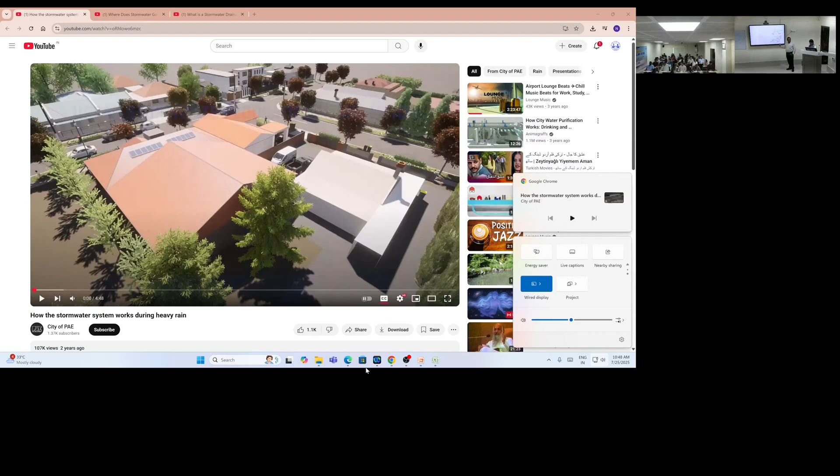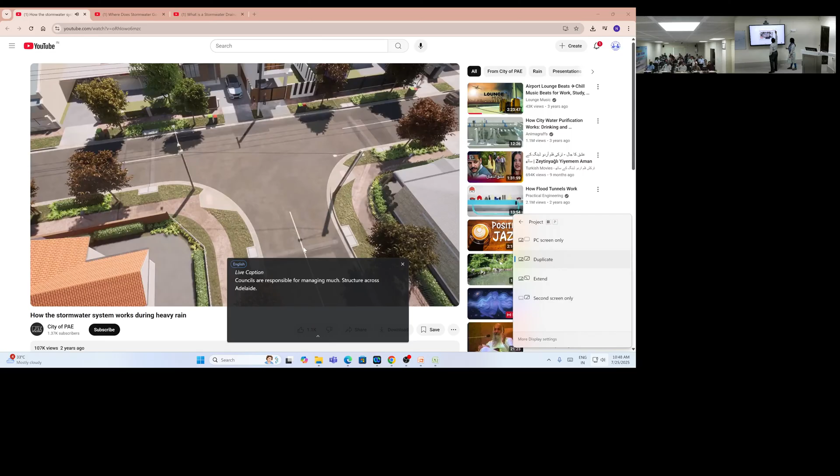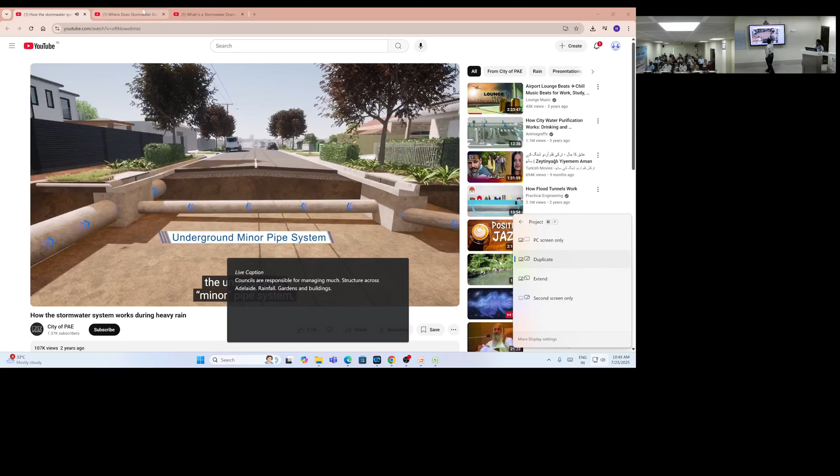Councils are responsible for managing much of the stormwater infrastructure across Adelaide. This video explains how urban stormwater systems work and what happens when we have rainfall. Rainwater falls on surfaces such as parks, roads, gardens and buildings. Rain runs off roofs, through downpipes and out to the street. A typical stormwater system has two parts that work in tandem: the underground minor pipe system and the overland major road system. Here is a cross-section of the underground minor stormwater system. This system transports stormwater during smaller storm events that typically occur once every 2 to 5 years.

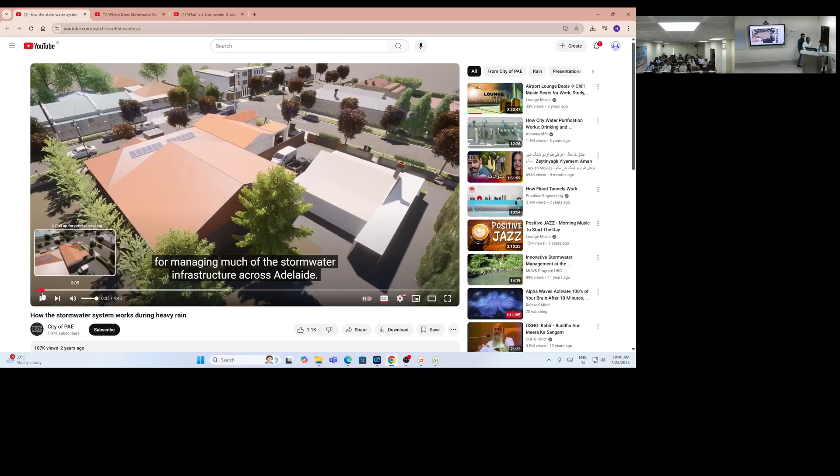Across Adelaide, this video explains how urban stormwater systems work and what happens when we have rainfall. Rainwater falls on surfaces such as parks. Councils are responsible for managing much of the stormwater infrastructure across Adelaide.

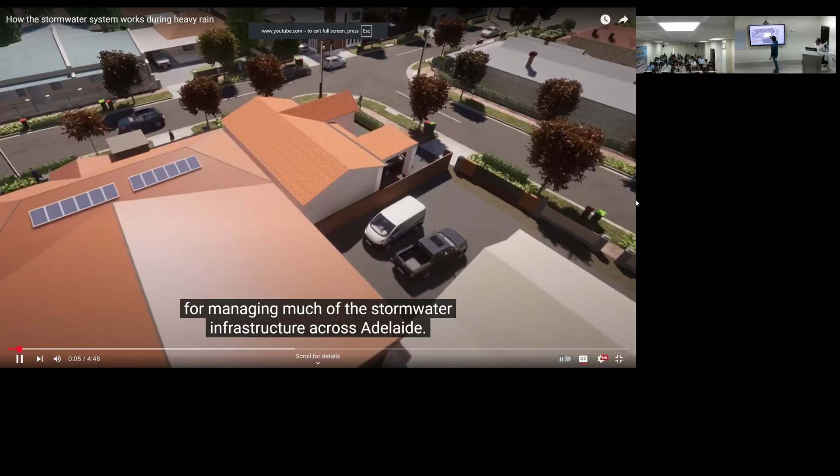This video explains how urban... why isn't the video playing there? Councils are responsible for managing much of the stormwater.

I stress you all to involve yourself always in such technological things. They are very easy to learn. You won't learn in one go, but you'll learn in 2 attempts. So this is one urban drainage, how storm water goes during the rainy season.

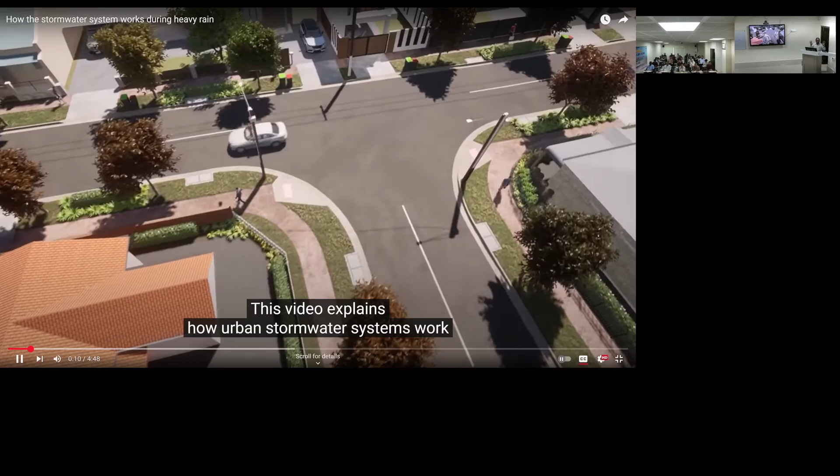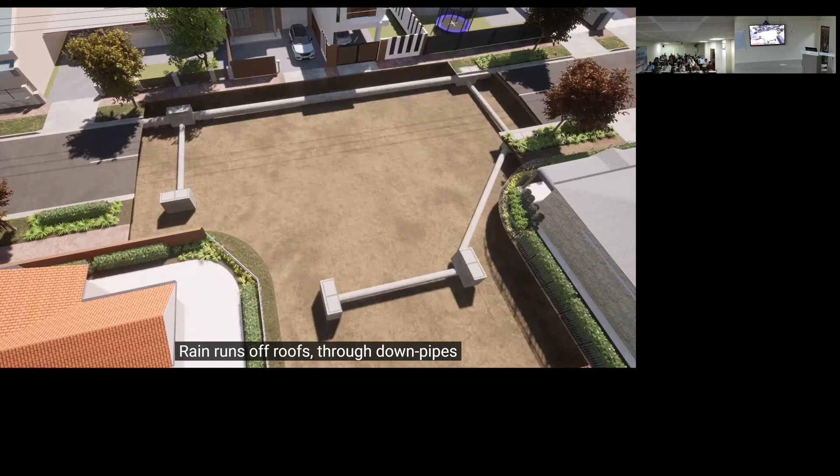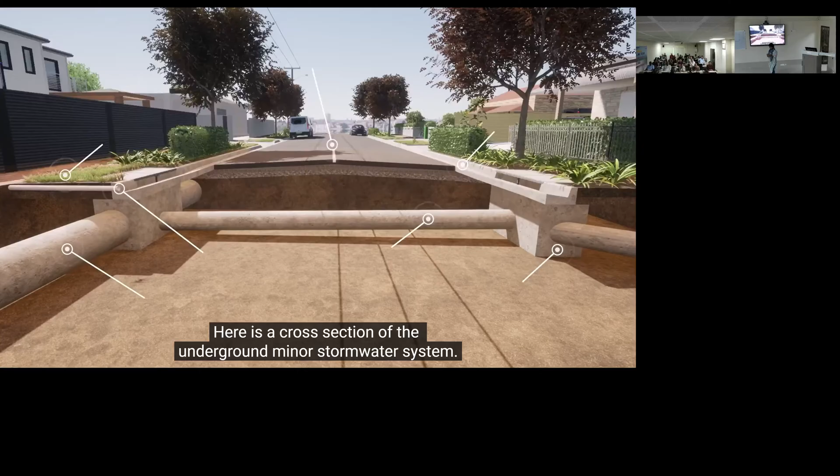Then flows into drains called side entry pits. The water then flows through a network of pipes where it is then discharged out to a creek, river, lake or ocean. When it rains...

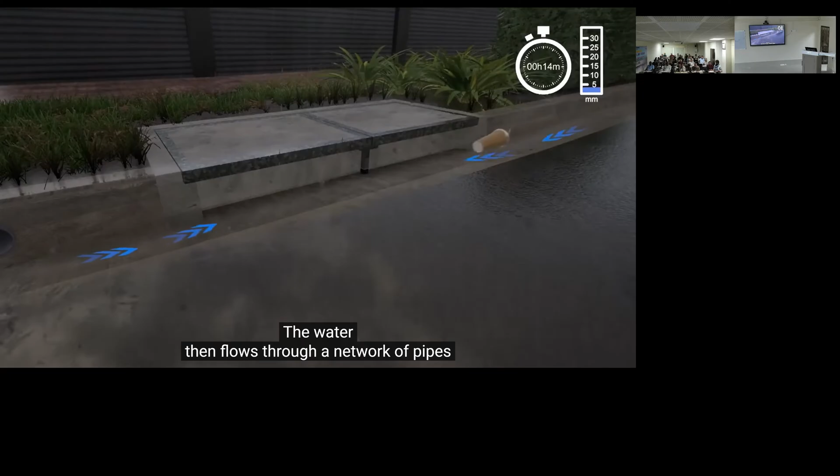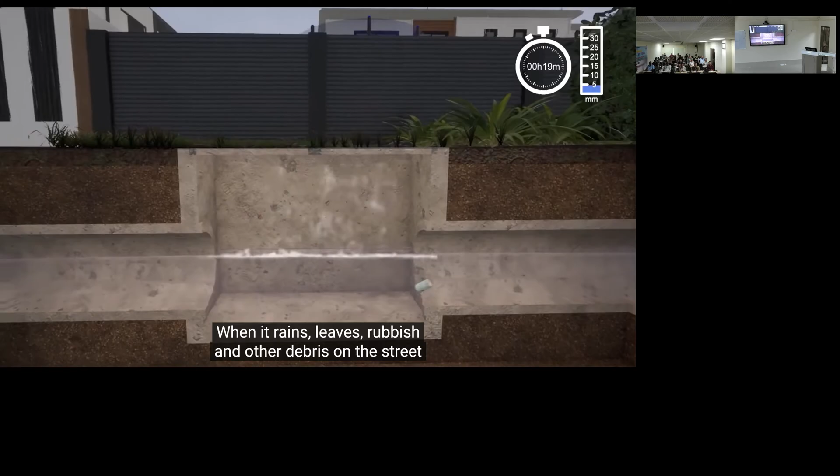Leaves, rubbish and other debris on the street can be washed into and may block stormwater drains. While street sweeping helps in picking up some rubbish, it cannot pick up everything, especially during autumn and winter where there is an increase in the amount of leaf matter on roads and footpaths.

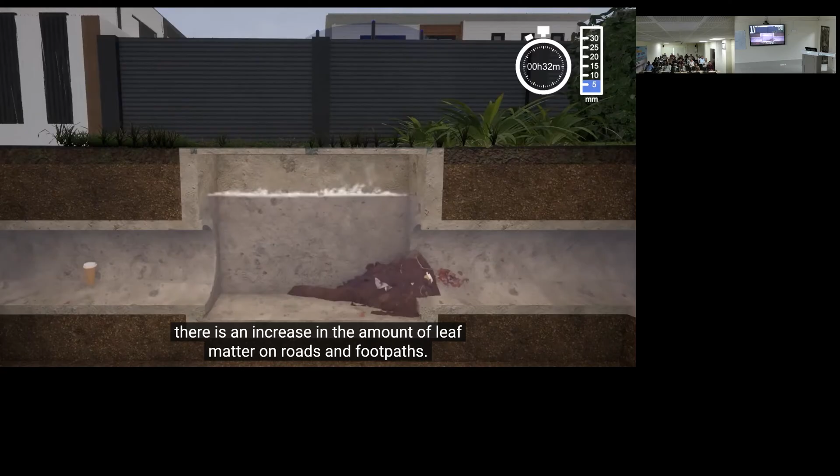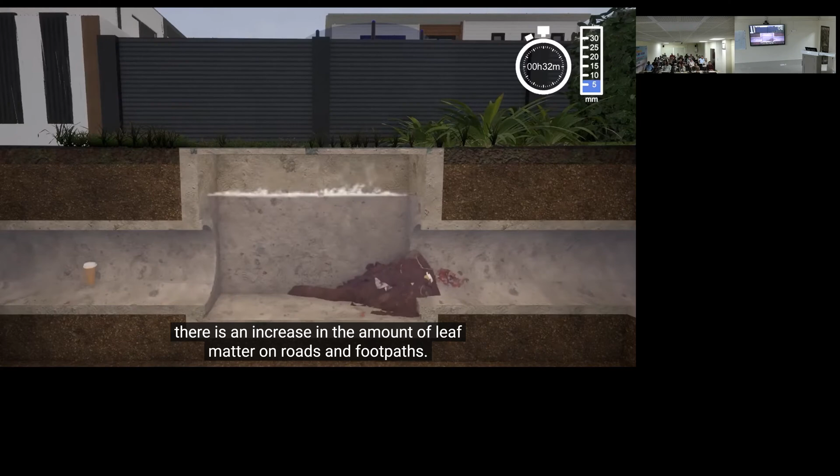Bigger storms with heavier rainfall occur less frequently. However, during these storms, the underground stormwater system fills and reaches its capacity. Stormwater in the gutters may subsequently start to rise and reach levels where the road becomes completely submerged, followed by the council verge. It is during these storms where we may experience temporary flooding of streets, as the street becomes the major overland stormwater system.

When this happens, it's important to not drive or walk on flooded roads, as you cannot see the condition of the road underneath or if there are any obstacles.

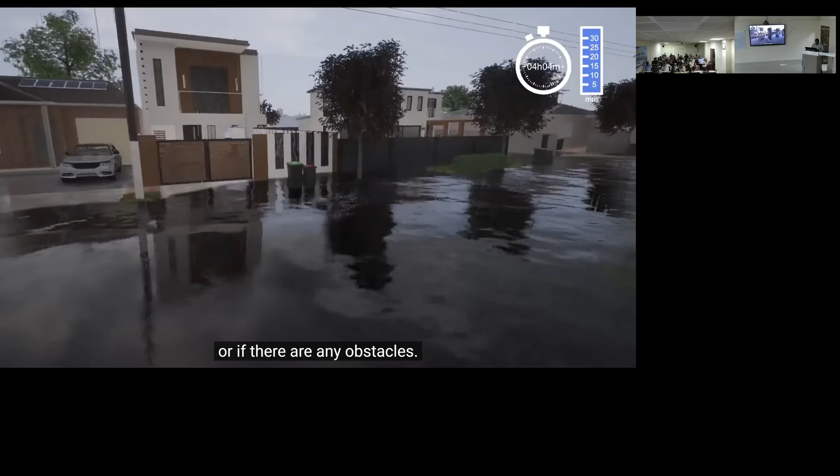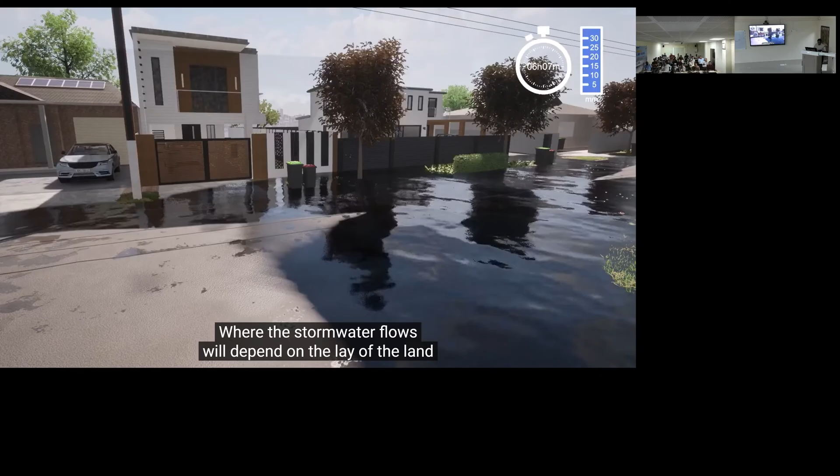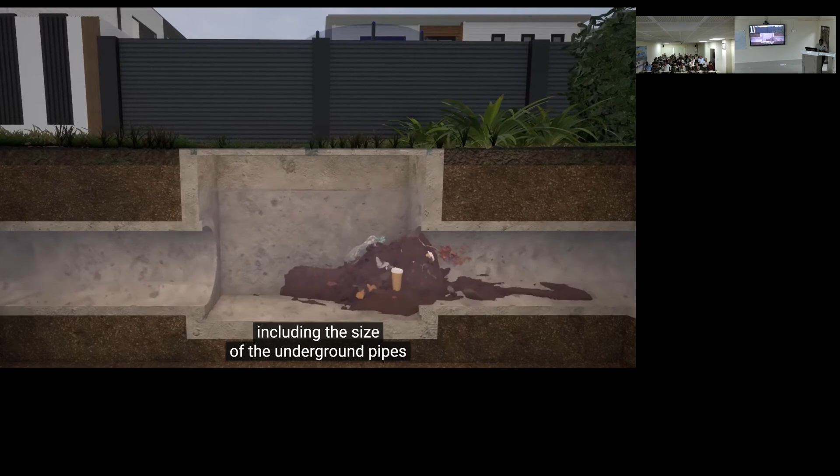Some urban stormwater systems along the coast are also influenced by tide levels. Major rain events that coincide with high tides or ocean storm surges impact the minor stormwater system's ability to drain out to sea. Even after the rain has stopped, there may be flooding until the tide level falls. During these times, stormwater may remain or pool in the streets for a longer duration. Likewise, during widespread heavy rains, creek and river levels rise and prevent the minor systems from freely draining, resulting in upstream flooding.

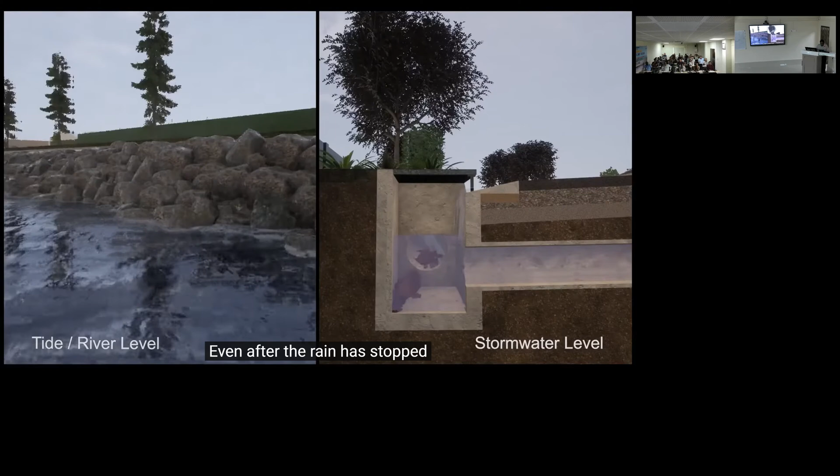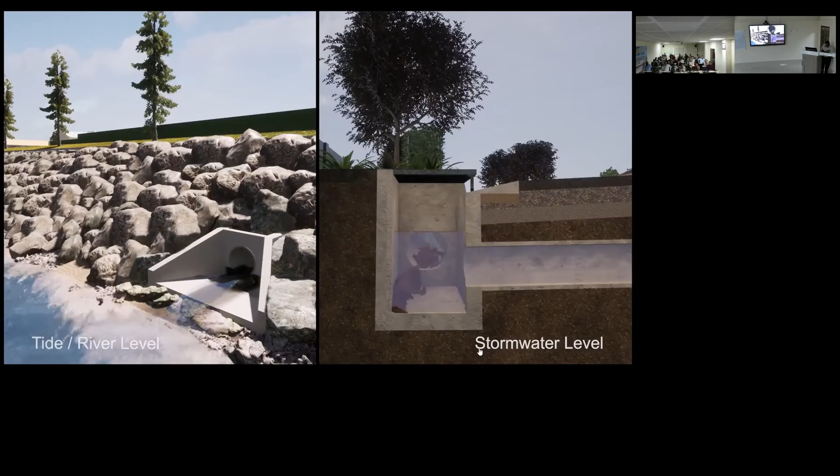This includes pairing stormwater management plans with other stormwater infrastructure. For information, the important thing here is...

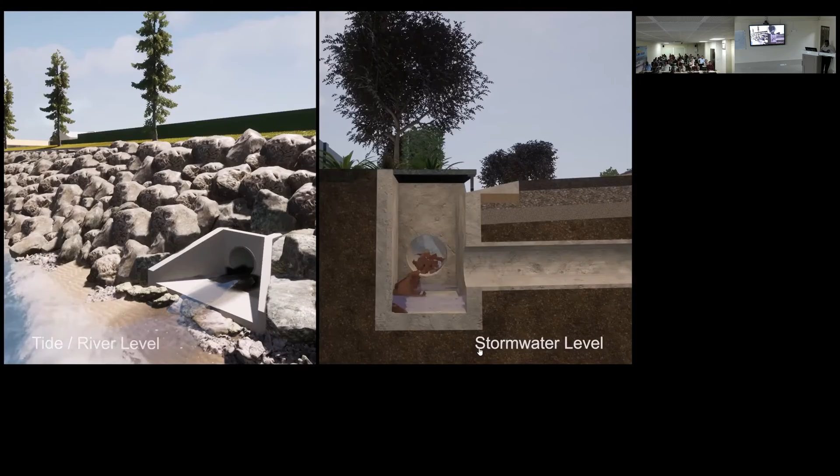How economically sound your city, municipal council, or urban local body is determines how well they will be able to design solutions. If you have the money, like in Tokyo, I got a chance to visit Tokyo. If you are very rich, they made one tunnel inside the city, and in that tunnel the water goes, and that tunnel is directly connected to the sea, at the sea level.

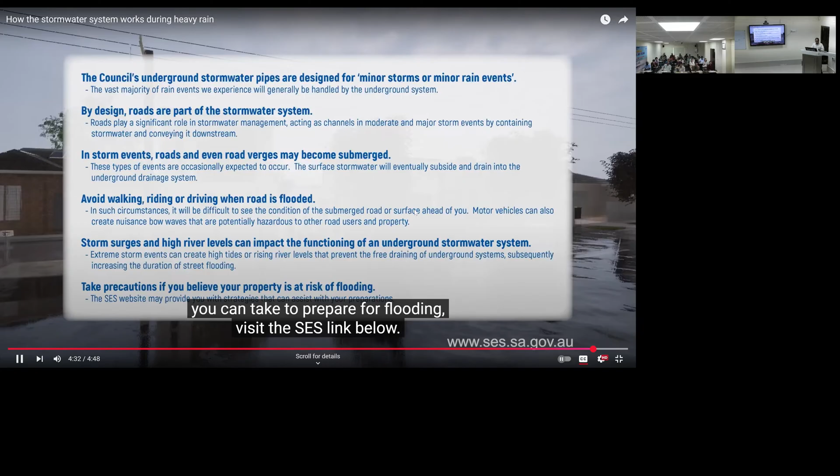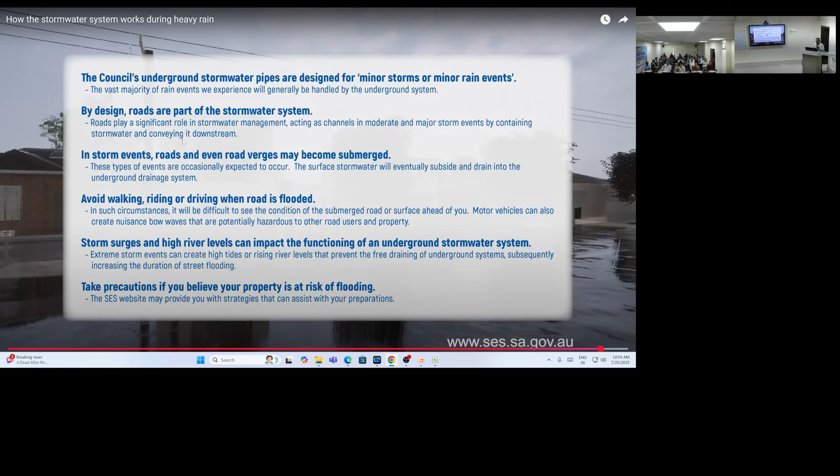So it is very clear that this problem is of urban areas only. Whenever you have a settlement and people started living on the river plains, they definitely face these problems. And even if they are not living in the river plain, in future times, whenever there is no infiltration area available for water, then it will flow on the surface and create runoff. So whenever you are designing a drain, you have to see how much of the rural area is in the command of that drain.

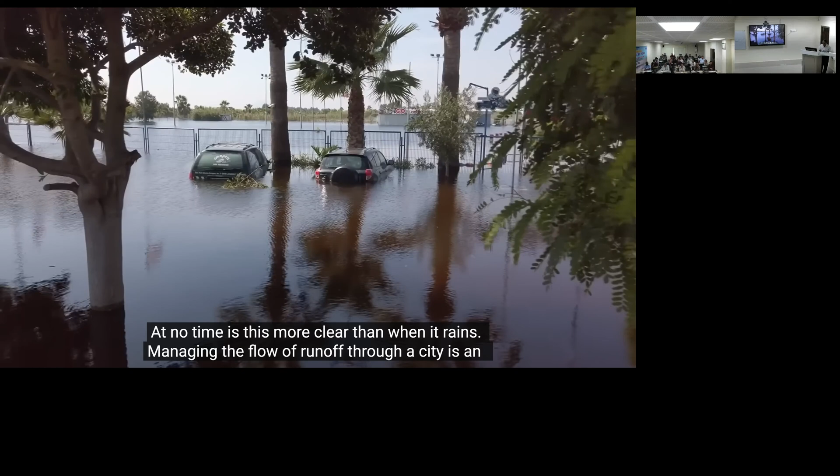At no time is this more clear than when it rains. Managing the flow of runoff through a city is an immensely complex challenge that affects us in so many ways, from public safety to property rights, from the environment to the health and welfare of citizens.

Hey, I'm Grady, and this is Practical Engineering. On today's episode, we're talking about urban stormwater management.

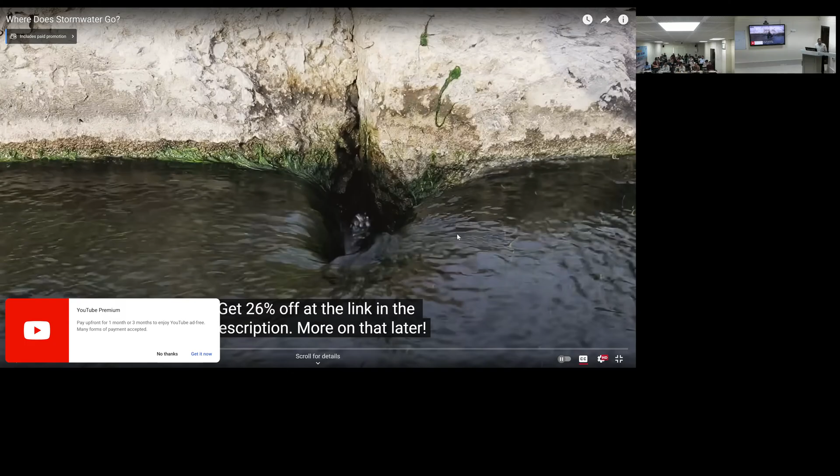The water cycle is one of the most basic science lessons we learn. So basic, in fact, that it's easy to forget how relevant and important it is to our lives. Take a look out your window when it's raining, even when it's raining hard, and it doesn't seem that significant. Some of the rain soaks into the ground, some gets taken up by plants, some gets caught in puddles, and some runs off downhill, usually into the street.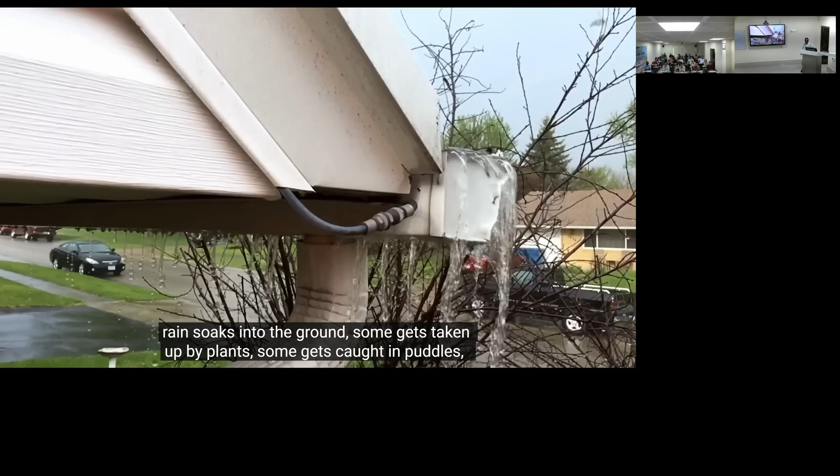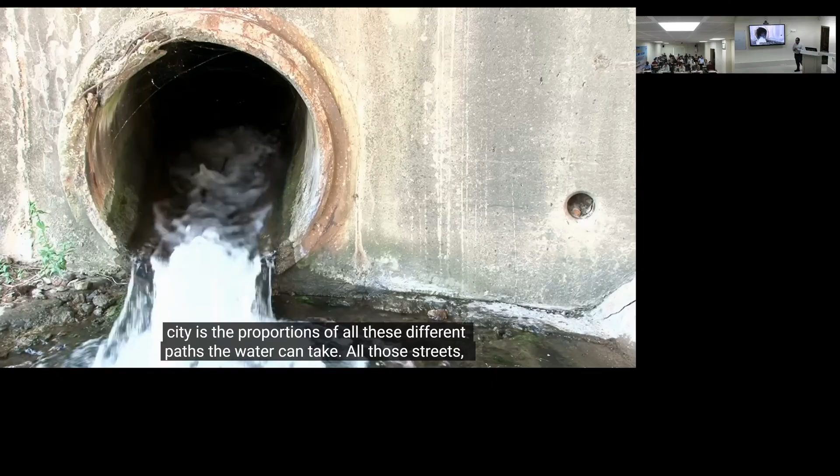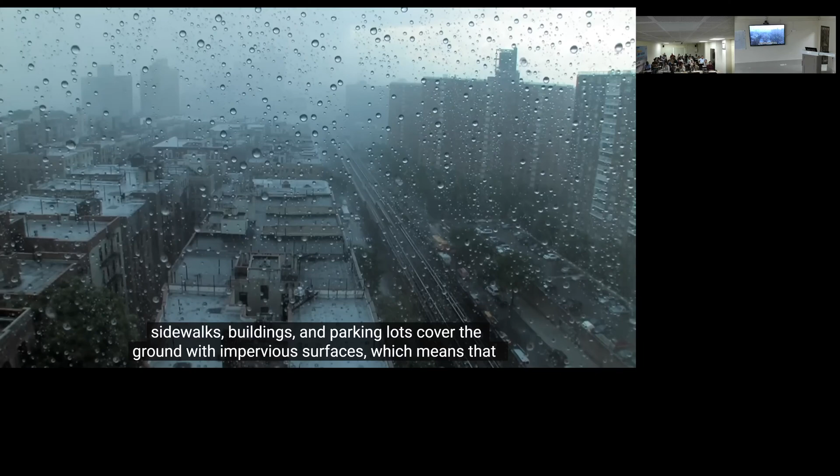One of the biggest challenges in a city is the proportions of all these different paths that water can take. All those streets, sidewalks, buildings, and parking lots cover the ground with impervious surfaces, which means that instead of water infiltrating, it runs off toward creeks and rivers, swelling them faster and higher and filling them with more pollution. One of the biggest impacts on the environment of building anything is its effect on how water moves above and below the ground during storms.

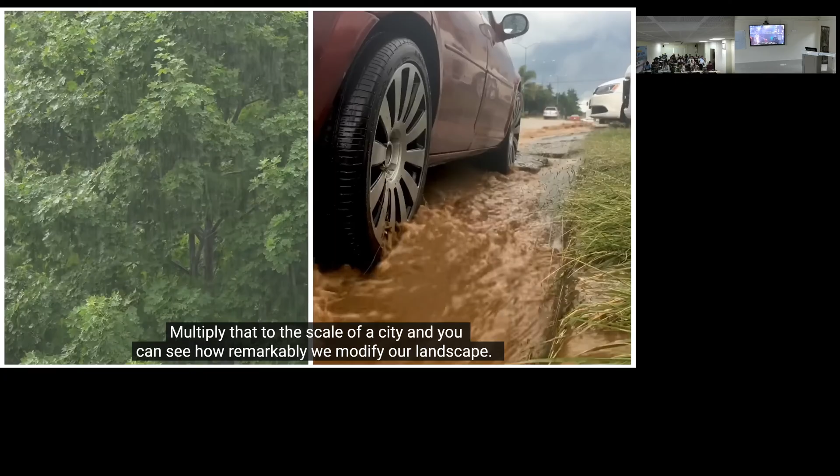Multiply that to the scale of a city, and you can see how remarkably we modify our landscape. Instead of acting like a sponge to absorb rainwater as it falls, urban watersheds act like funnels, gathering and concentrating rainwater runoff. In this video, I want to walk you through some of the infrastructure cities use to manage this massive challenge and a few new ideas in stormwater management that are slowly taking hold in urban areas.

Like most of the biggest challenges of building and maintaining a civilization, the negative impacts from adding impervious cover don't befall the property owner doing the adding, but rather the people downstream. Just like dumping pollution into the river carries it away to the next guy, it's easy to make bad drainage decisions into someone else's problem.

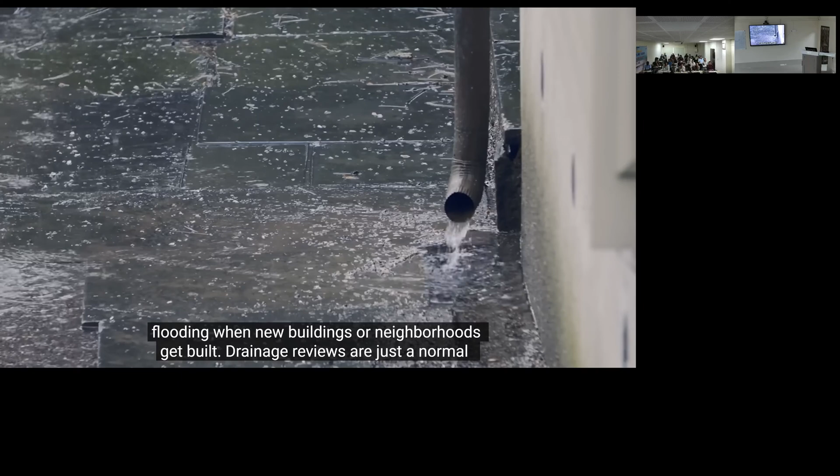That's why most large cities have rules about flooding when new buildings or neighborhoods get built. Drainage reviews are just a normal part of the process of obtaining a building permit these days. If you live in a major city, just do a search for your local drainage manual to see the kinds of things that are required.

Increased runoff has been a problem since people started living in cities in the first place. And the first way we handled it was simply to get the water out and away as quickly as possible. That's because runoff creates flooding, and flooding causes billions of dollars of property damage.

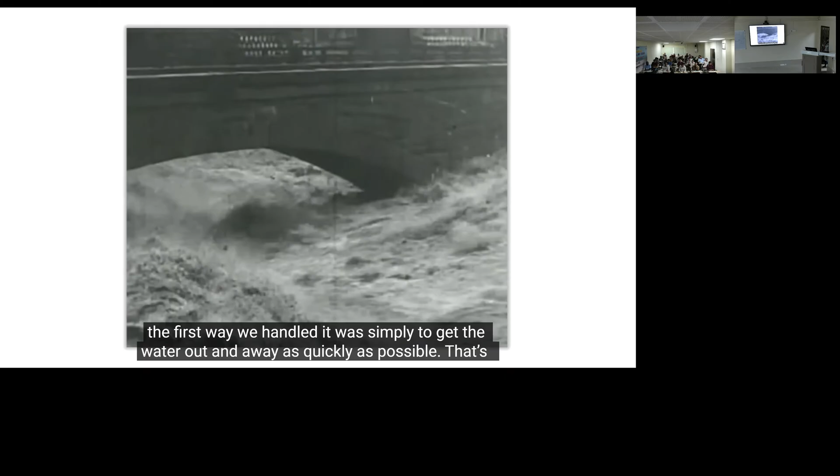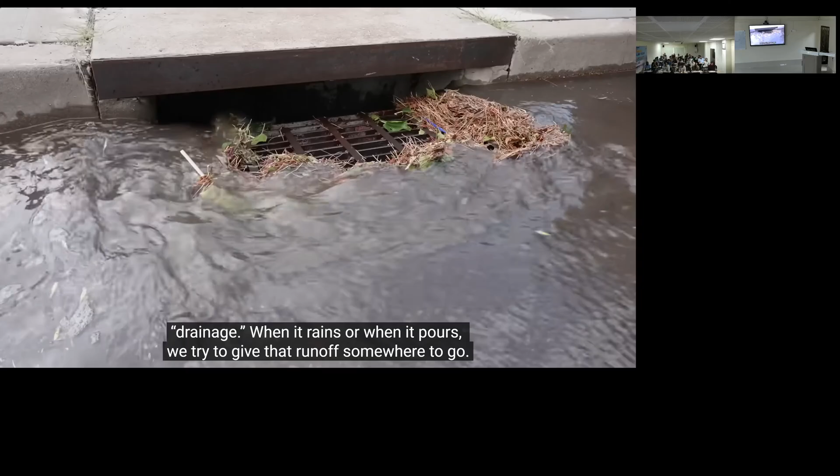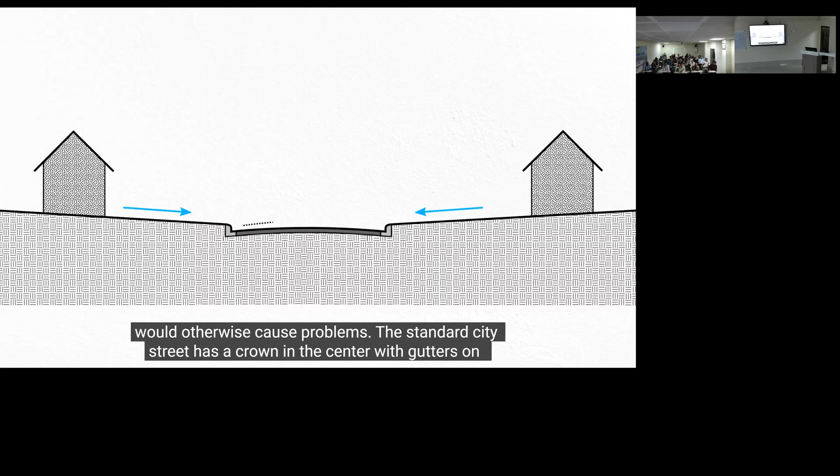There's actually a good reason not to. At the end of each sanitary sewer system is a wastewater treatment plant, and it was never meant to process a massive influx of combined sewage and stormwater runoff at the whims of Mother Nature. In the worst cases, these plants have to release untreated wastewater directly into waterways when it's too much to store or process. That's why most cities now use municipal separate storm sewer systems, usually abbreviated MS4s — networks of ditches, curbs, gutters, sewer pipes, and outfalls solely dedicated to moving runoff.

These inlets aren't just places clowns hang out — they usually represent a direct path between the street and the nearest creek or river. There's not usually any treatment happening along the way. These sewers are not for waste. Whatever you put in the storm sewer system goes directly into a waterway, so please don't dump stuff in there.

It's easy to see why cities try so hard to get stormwater out as fast as possible if you look at the floodplain. This is just the area most likely to be inundated during a major flood, and land is one of the most valuable things that could be flooded.

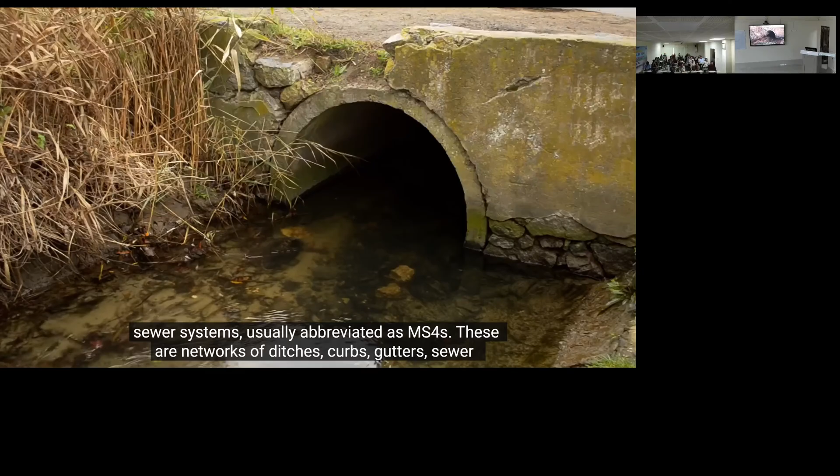Cities need to keep up with the increased runoff from more and more development. That's why most cities now require developers to take responsibility for their own increase in runoff, which by and large means on-site storage for stormwater. Retention and detention ponds act like mini sponges, absorbing all the rain that rushes off buildings, streets, and parking lots, and releasing it slowly back into the water.

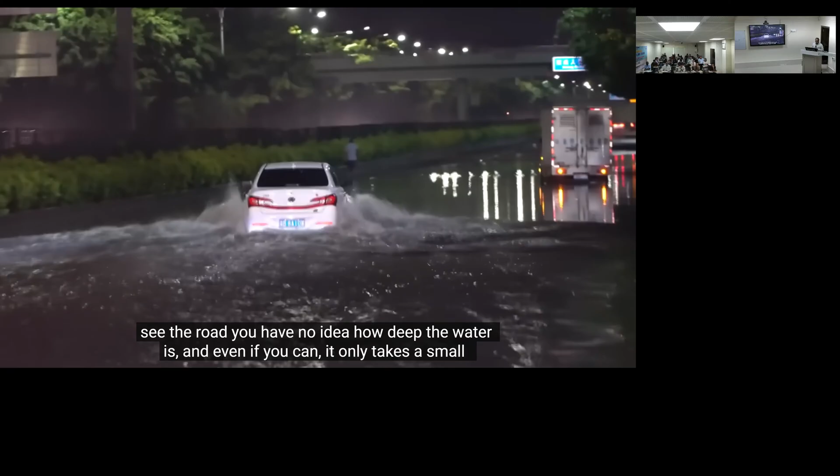Any location where a road crosses a waterway, whether it's a bridge, a culvert, or a low water crossing, there's always a chance of flooding getting so bad that it overtops the road. If you ever see water over the top of a roadway, just turn around. Half of all flood-related deaths happen when someone tries to drive a car or truck through water over a road. If you can't see the road, you have no idea how deep the water is, and even if you can, it only takes a small amount of swift water to push a vehicle downstream.